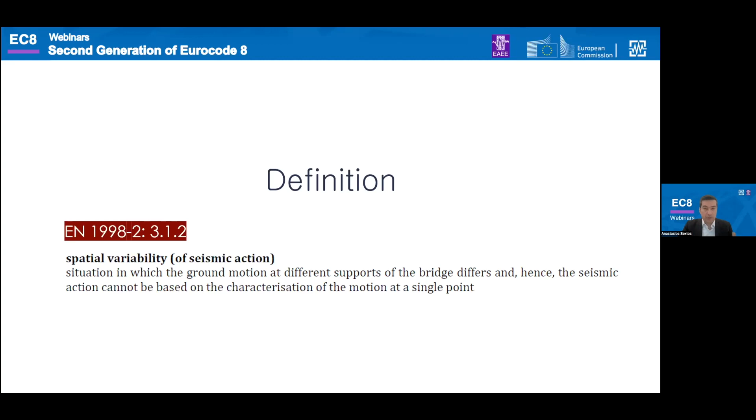So for the code, spatial variability is essentially a situation where ground motion between support points is different for whatever reason. In such a case, the code is suggesting that we should not do uniform excitation analysis - that is, time history, response history analysis with a single earthquake record for all supports. You may see that also in the literature as multiple support excitation or asynchronous excitation, but for the Eurocode, it's spatially variable earthquake ground motion.

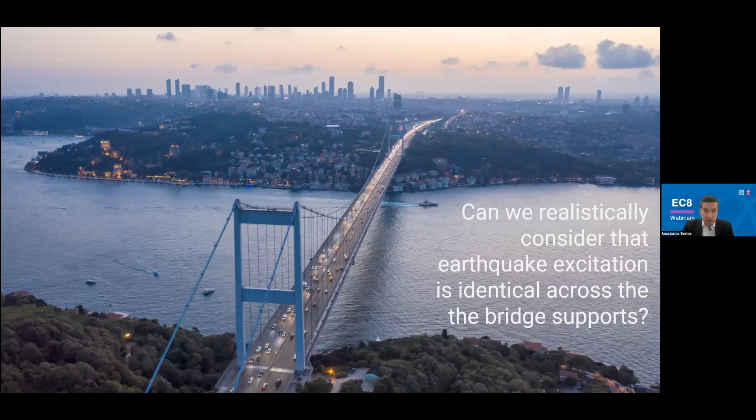Even intuitively, we can understand that ground motion shouldn't be the same. The trick is how to calculate it and introduce it in a code framework. Essentially, in order to do that, the previous version and the current version are splitting the problem in the background into several different scenarios and phenomena that are running.

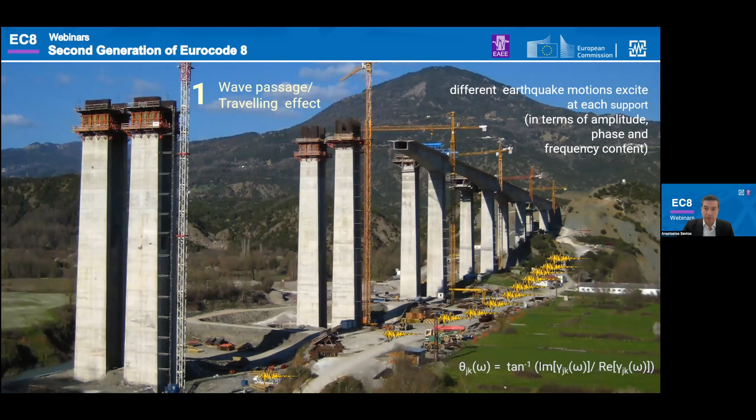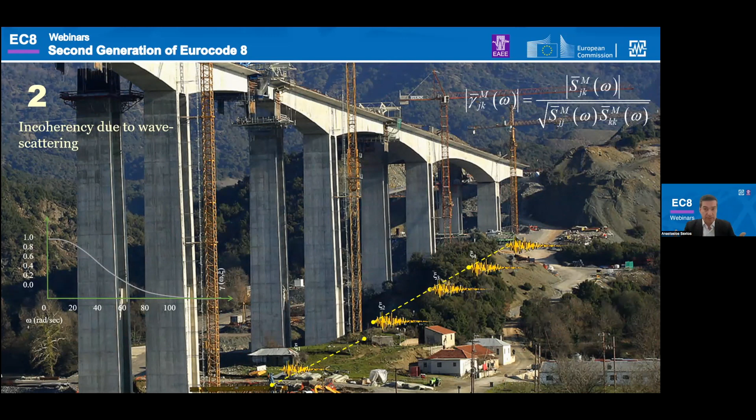One is the obvious fact that it takes some time for the waves to travel across different bridge supports. The second is that as the waves are traveling through the soil media, they are reflected, refracted, superimposed in all sorts of ways, and therefore they are losing their stochastic dependence, which practically means that if you compare two ground motions, they won't look the same.

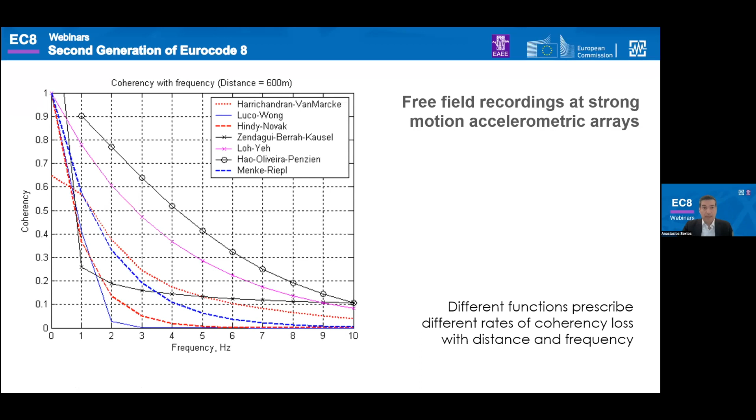That's the second important thing the code takes into consideration. If this is plotted versus measurements that have taken place worldwide, it effectively leads to something called coherency - the stochastic correlation, or how similar the ground motions look, in terms of phase and amplitude. Importantly, in the code, this coherency, this correlation drops with frequency, drops with distance. So the longer the span between two supports, the less correlated the ground motions are. The higher the frequency, the less correlated the ground motions are. This is nicely reflected in the code.

Obviously, there are also some other aspects, like local site conditions, 1D effects, 2D effects, 3D effects, topography effects, as Professor Paolo Franchin previously explained. This is also somehow implicitly accounted for in the code, as you will see. An important disclaimer here: when the bridge is short, and the time delay is not so important because of the short length, then these site effects dominate the problem, which is also qualitatively accounted for in the code.

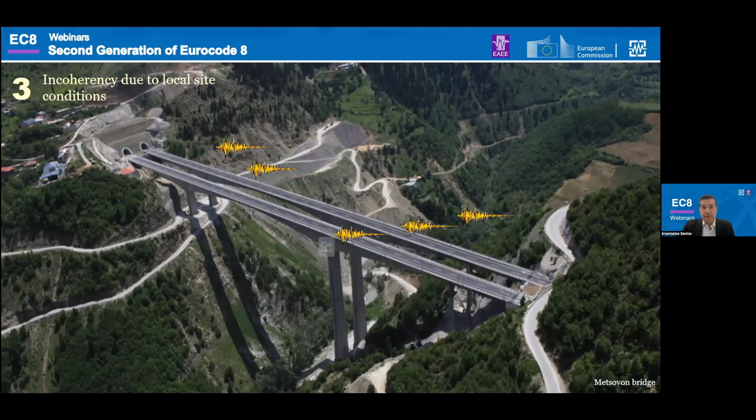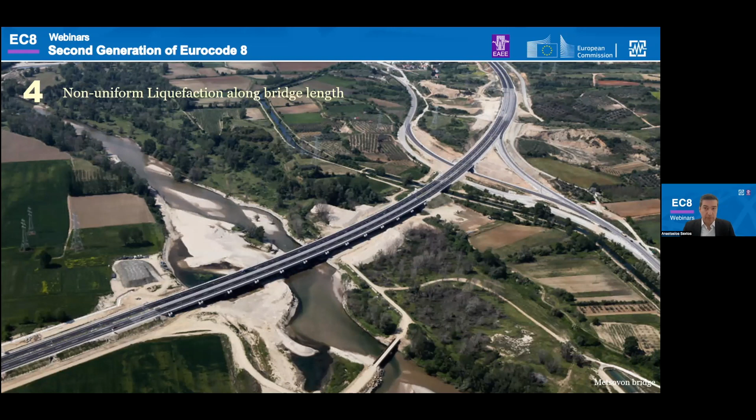This can be even more pronounced in case the soils are not just different, or site response is so different due to liquefaction effects or other special effects. So the less uniform the soil is, the less correlated or coherent the ground motion is, the more different the bridge response is. This was just a short introduction so that whenever we see something in the code, we understand what is what and why it is there.

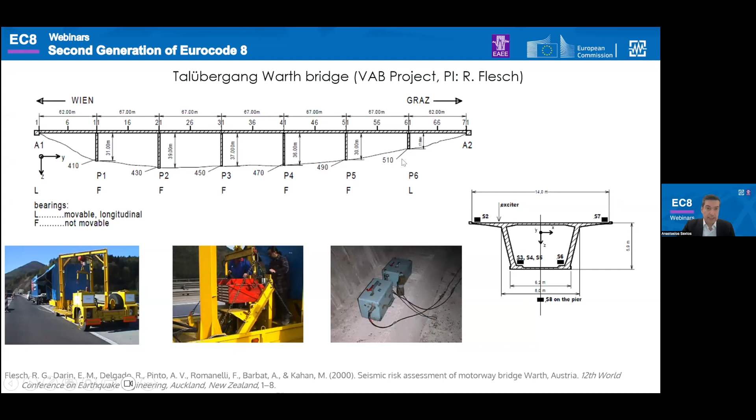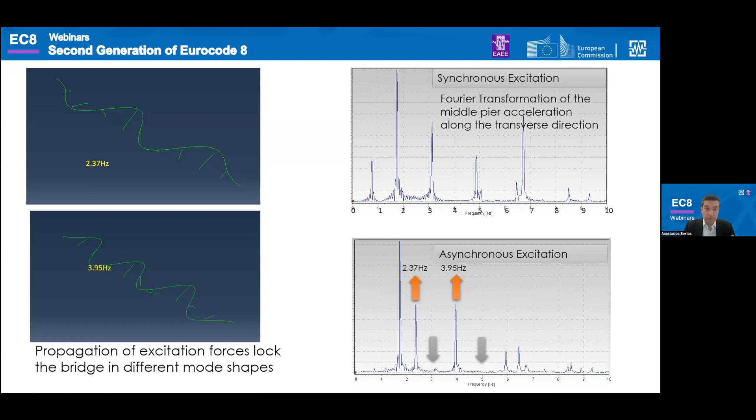Then the response of the bridge, because ground motions are not uniform as we assume in our computer models, is quite different because there are some modes—not any mode, typically the first and second antisymmetric modes—that get excited. If you plot the Fourier transforms or the contribution in any other way, you will see that they are excited. This is just a video to visualize it.

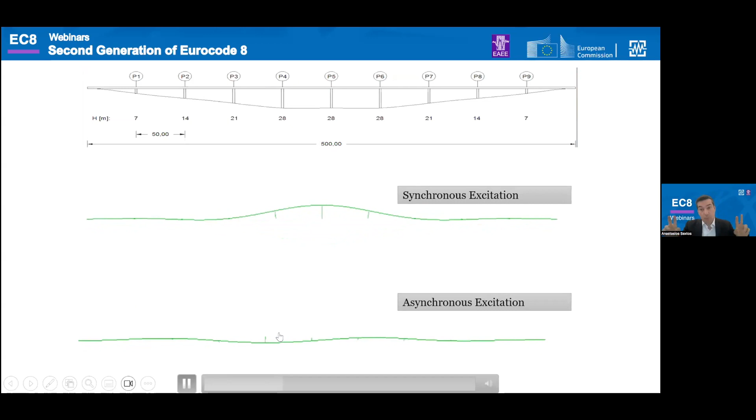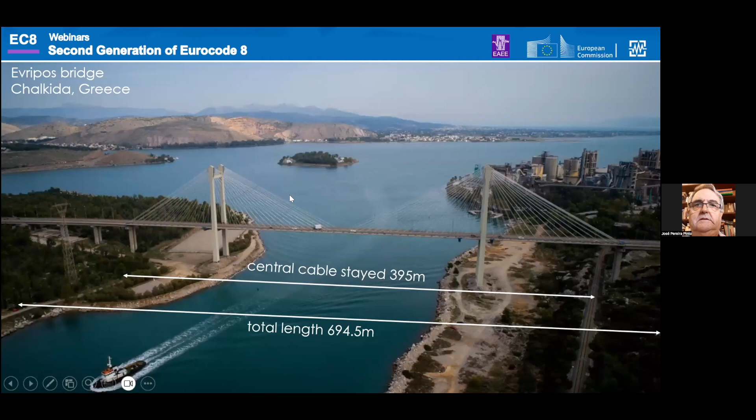I promise I'll switch directly back to the provisions. Essentially, if we excite this specific bridge with a single ground motion, uniform excitation, or with a bunch of different ground motions that are partially correlated, and run the response, looking at the bridge from the top, you will see that the transverse response for synchronous excitation is pretty much in its first transverse mode. Due to the more accurate asynchronous motion, it takes the shape of the first, second, and third antisymmetric modes because of the waves that travel. This is fundamentally different, and that's what the code is taking into account, which has also been measured in other bridges.

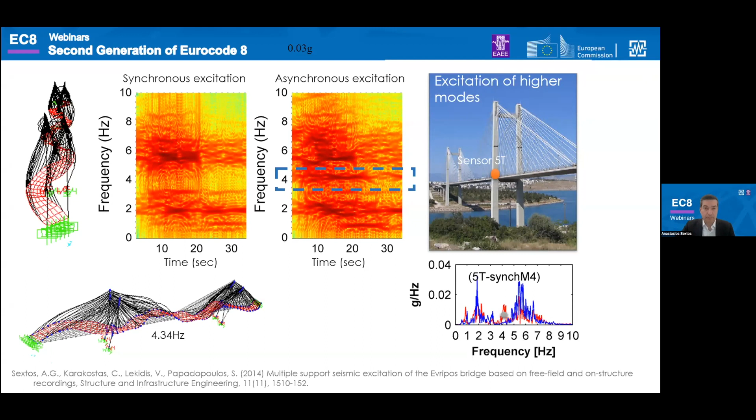That's my last scientific slide, I would say. If you plot the measured response of a bridge in the frequency-time space, when ground motion differs between different supports, an additional frequency of excitation appears, and this relates to an antisymmetric mode. So this doesn't happen in like 80-90% of cases, but whenever spatial variability phenomena are important, that's part of the picture, and that's essentially what the code has been trying to address from the previous version.

I'm now going directly to the code provisions—what the 2005 code was prescribing to account for this problem. First, it was offering the possibility to do something which was pioneering for the time, really. Then it was offering a quantification of this phenomenon, at least in terms of when you should account for it and when you could neglect it. And thirdly, it was offering a simplified static approach.

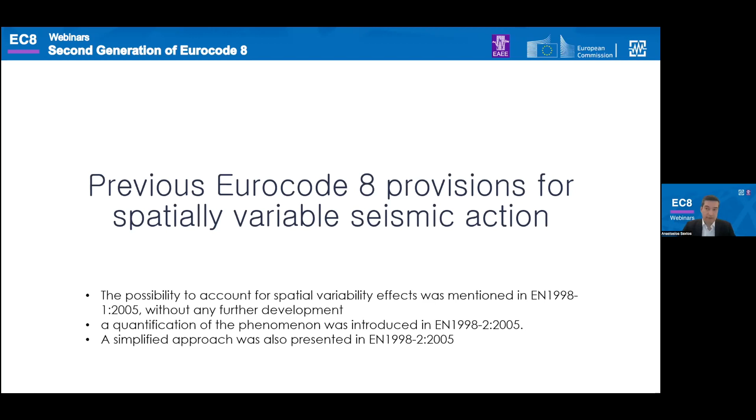I'm just showing you a couple of slides about what the previous code was doing, in case you're familiar with it, and also to understand how the evolution is now made to something similar but more accurate. The code was essentially providing a table, rightly so I think, saying that if your soil is quite stiff—let's say type A category—then you are more tolerant in terms of spatial variability, because most probably the soil is uniform and stiff, so site effects are limited, and therefore correlation of ground motions looks more like the synchronous case that we're accounting for.

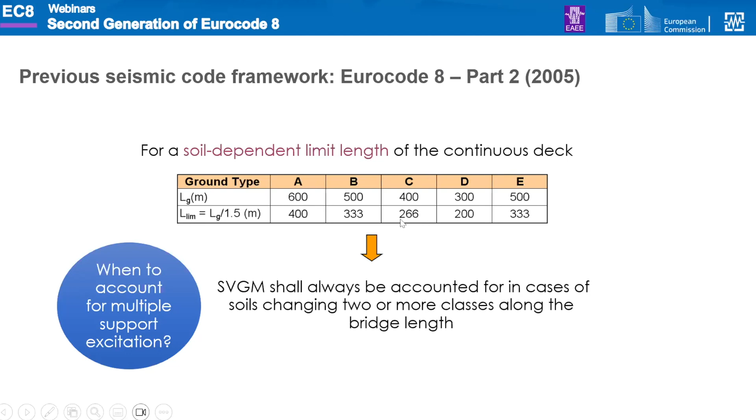So the softer the soil, the smaller the threshold length beyond which you should account for it. The code was providing these simple rules for where you should think about spatial variability and where you can neglect it.

Then it was offering—and this was really quite novel for the time—requiring the engineer to do two static analyses on top of the standard response spectrum or whatever nonlinear or linear time history analysis. One was to excite the bridge in pseudo-static displacements with a shape you can see here, this linearly increasing shape of support deformations. The other was kind of a deformation vector where the sign was changing from one support to the other. Whatever the static situations, you were getting some design quantities out of two static scenarios.

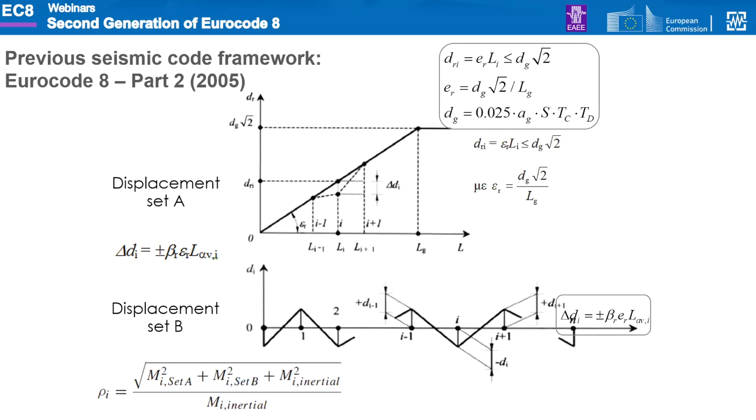You had a conventional one—this was the third one—and you were superimposing the design quantities out of these three scenarios. Now, the good news was that you were doing something. The challenge was that, A, this was static, and B, whatever the situation, the influence of spatial variability was quite low. So that was obviously in the right direction, but it was not necessarily capturing the dynamic nature of the problem we've been discussing, which I think is now more properly addressed.

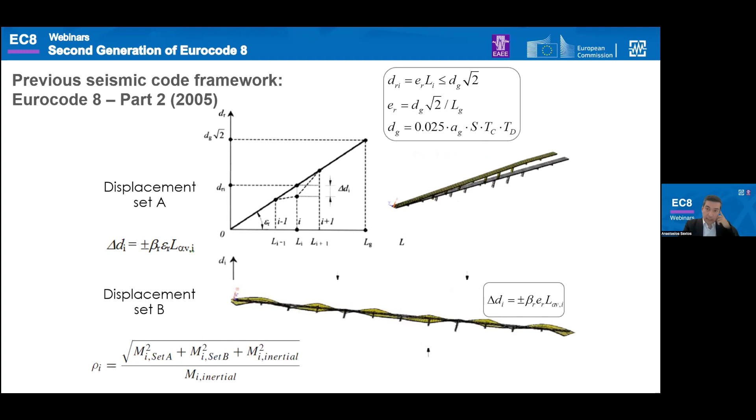This is how the static deformation scenarios looked like, and effectively this was the simplified solution that was offered. But the previous version was also wise enough to offer a rigorous method as well—not easy to apply, but quite accurate. This actually still stands as a method. The first equation is from the work by Professor Deodatis. The second equation is from the work of Professor Der Kiureghian at UC Berkeley. So essentially, it was also offering two rigorous solutions for those able to follow them.

The one was that, in case of a response history analysis, this is the way to generate your samples.

Effectively, there was a factor L relating to the loss of coherency that I was talking to you about. Omega was the frequency, theta was the delay, and phi was effectively a stochastic parameter to introduce some randomness in the generated sample. So this was quite an established method.

Then there was also the option to run a multiple response spectrum analysis. So a response spectrum analysis in principle, where you would have a different response spectrum for each support if the soil was different. And the way to superimpose for that was essentially using this equation, not the easiest probably in the world, but definitely was something that was in the code and you could follow.

An important parameter here is that D is the spectral displacement coordinate, if you like, and this rho here was practically the correlation between two adjacent support points for all possible pairs. That's the reason for the various summations here. So this was what the code was prescribing.

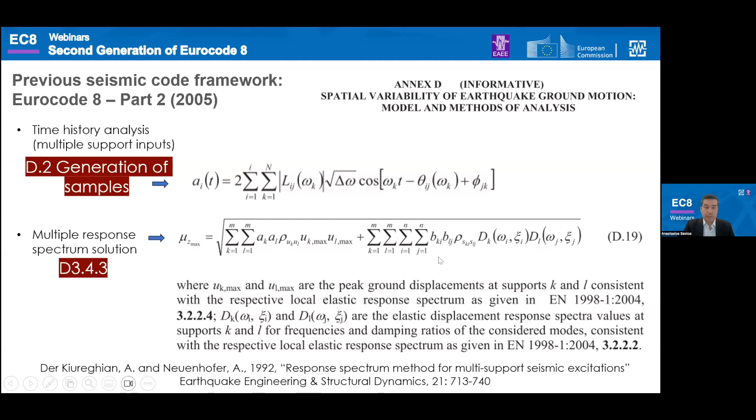Now, in the new Eurocode version, the new Eurocode provisions, the committee has essentially stepped on the existing provisions by injecting some more recent, let us say, research that has been established elsewhere.

So one important thing we need to clarify is that if you're looking for spatial variability effects in the code, you have to both look at the seismic action provisions in Eurocode 8 Part 1.1, because in principle, non-uniform earthquake excitation could also be applied in other structures. So that's a more general issue and therefore went to that part of the code. And also more specific provisions naturally for bridges, which is introduced in Eurocode 8 Part 2.

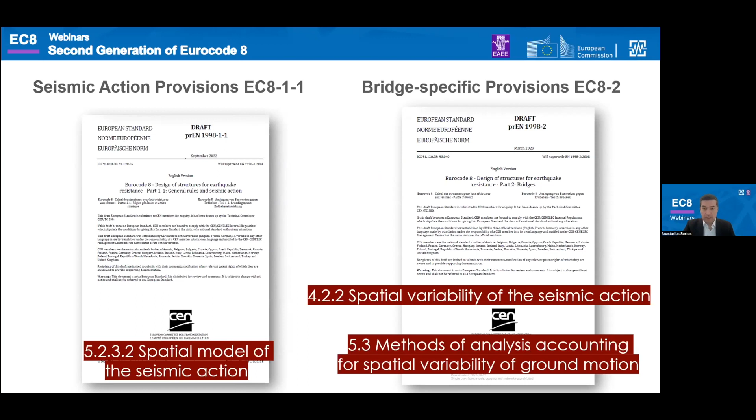So we'll be having some different tags depending on where different tables are coming from, just for you to be able to find them more easily. So first of all, the code for bridges is describing explicitly when we should take into account this specific problem.

There are three reasons or three rules. Any of the three, if it applies, will force us effectively to do something, and this is prescribed in another table, this famous table 5.3. So when should we account for spatial variability?

A, when the soils are quite different, and this is quantified by having an average VSH that differs by more than 200 meters per second. Now, why is this number? Because this was the average difference between different classes. How you would define VSH for the entire soil profile, that's something prescribed in Eurocode 8 Part 1.

So if your soils are different or too different, then you should do something according to the table. Or if your bridge is quite long, how long? This is the table: if for soil A it exceeds 400 meters, for soil B exceeds 300 meters, and so on.

Thirdly, if your bridge is perhaps not so long, but you do have quite long spans, because effectively what we are talking about is correlation between different pairs, and that's not just an issue of the total length. It is also an issue that relates to the distance between adjacent piers.

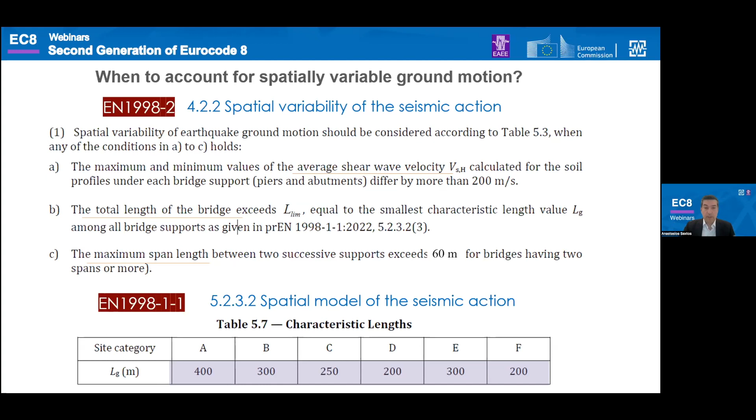Therefore, if any of these three applies, you should do something. We'll come back to that, what you should be doing in each situation. It is also building the current version in Part 2. It is building on the previous provisions that I just showed, the method presented by Professor Der Kiureghian.

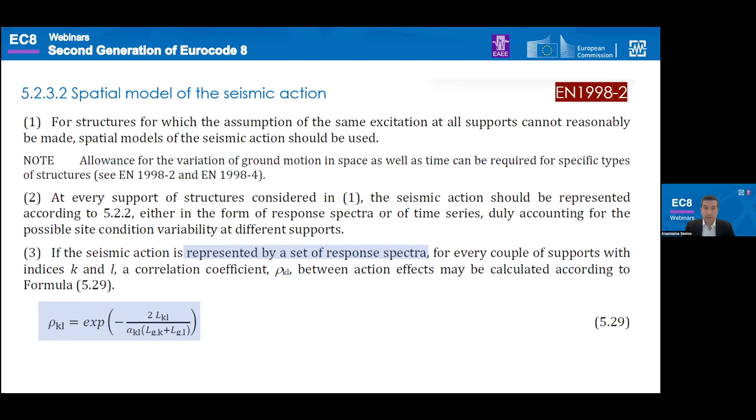So in case you would wish to represent spatial variability of ground motion by a set of different support-dependent response spectra, and you would need to find these correlation factors from one point to the other for all possible pairs, then you can use this exponential factor. No surprise, this is a factor that drops with distance, a decay factor, because like we discussed, the correlation between different ground motions drops with distance.

And therefore, not only can we have this factor here that reduces the correlation factor with distance, but also an additional factor, the AKL, that accelerates this decay of correlation when the soils are less uniform, because effectively it subtracts the characteristic lengths of different soil profiles, which means that the more different they are, the higher this coefficient, and therefore the quicker the drop of coherence. But if they're identical, say in the case of uniform soils, this all ends up equal to 1.

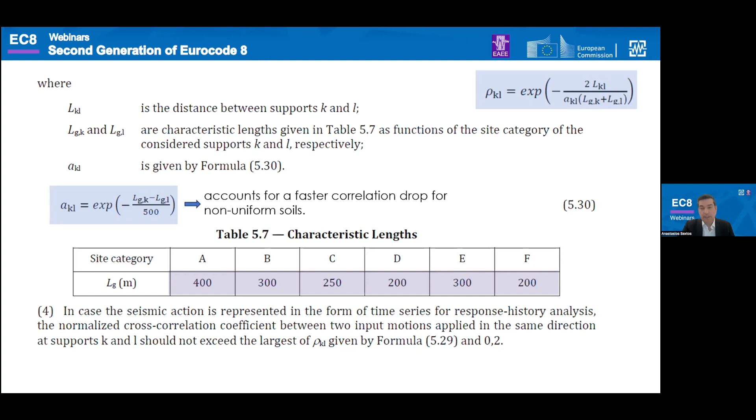This is a very simple solution offered by the code for those who would be interested to do more rigorous multiple response spectrum analysis. This is just for your information.

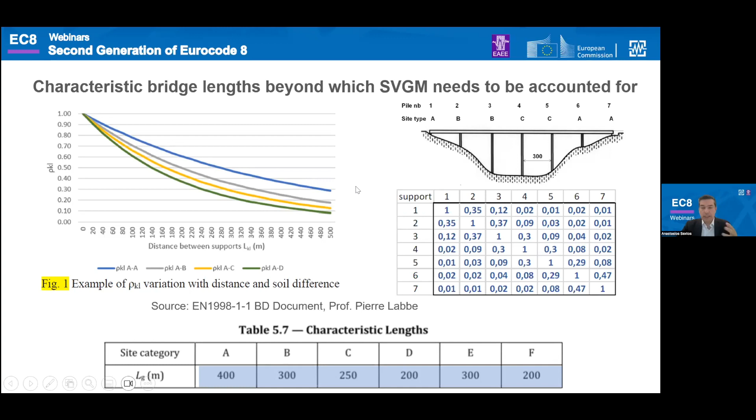If you plot that in a chart, you would see that between different points, the further they are apart, the quicker the loss of their coherency, and basically the quicker the reduction of this correlation factor. That makes a matrix, because all pairs involve all different support points. The correlation of motions at the same point is unity, while the partial correlation of ground motion drops like this. So effectively, this is in the right direction, it seems.

It is also offering a set of quick advice on what we should be doing when designing structures for spatial variability, assuming that it is required depending on the situation. The basic distinction made, in a vertical sense, is whether the bridge is short or long, and this also involves the span. So there are essentially two extreme situations: either the bridge is short and has short spans, or the bridge is long or has long spans.

In the first case, if the soil is uniform, the code simply says you should do nothing. You just have some rest, like the person here, or have a cup of coffee and you're done with spatial variability. But if your bridge is long, or you have a long span, then essentially you should do something.

The code offers a simplified higher mode excitation method, which I'll describe. For those who don't want to implement that, there is a way to get away with it by not applying the simplified method, but instead applying a penalty to the design quantities, increasing them by 20%.

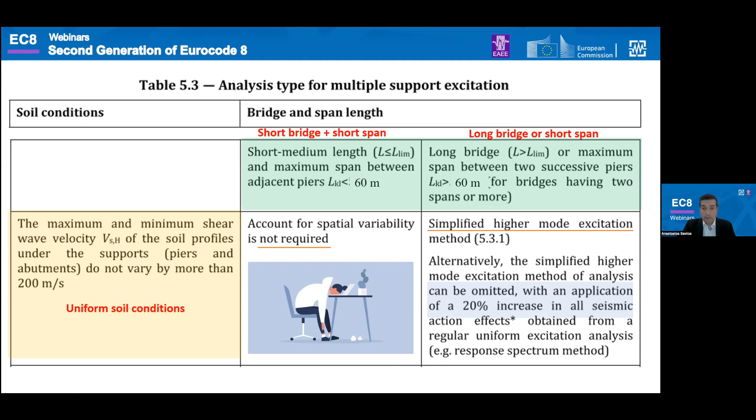Now there is also the case where the soil is non-uniform, so the spatial variability effect is more pronounced. In the case that the bridge is short, the span is short, yet the soils are very different, the code suggests what's important is not the wave passage, but mostly the local site conditions.

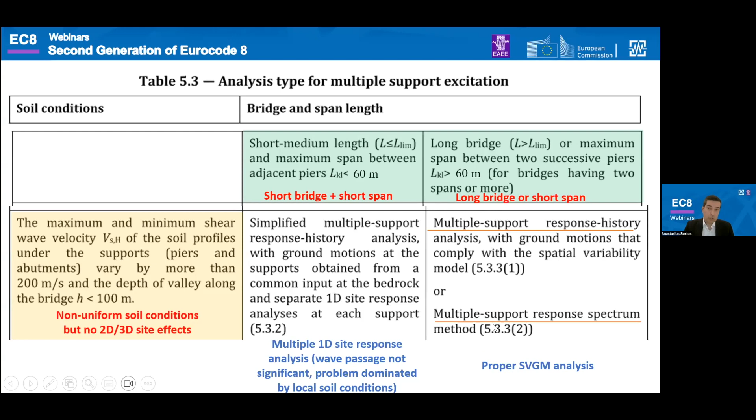But if the bridge is long or the span is long, then you should do a proper spatial variability analysis, either in the time domain or the frequency domain, with multiple support response spectra using the correlation factor the code provides. Then there is also the case that the designer wouldn't like to do that.

The code offers the possibility for the designer to simply not do 1D effects and 1D site response analysis, but instead take the penalty, increasing the design quantities by 20% for the short bridge and span scenario, or by 30% for the long bridge or long span scenario. That gives some freedom and flexibility to the designer, since not all design offices have the ability or confidence to work with these methods.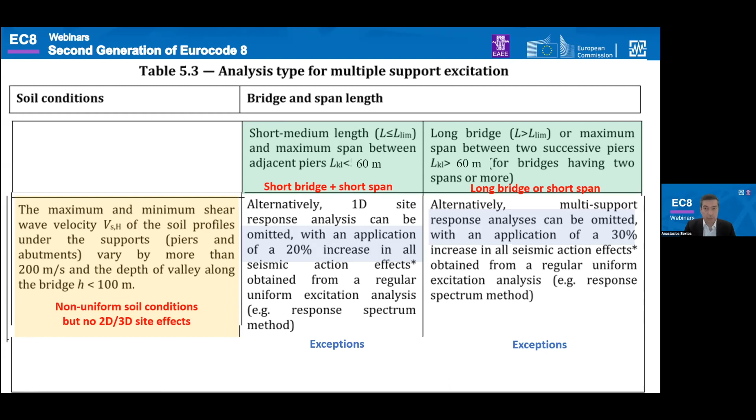But clearly with this approach, the more complex the problem, the more complex the method. Still, the designer can always get away with a simple penalty rule. In the case that the situation is so complex that there are topography effects, 2D effects, 3D effects and the like, then someone would either apply a 30% increase in the design quantities or do a proper analysis, including the entire valley, and a proper site response model.

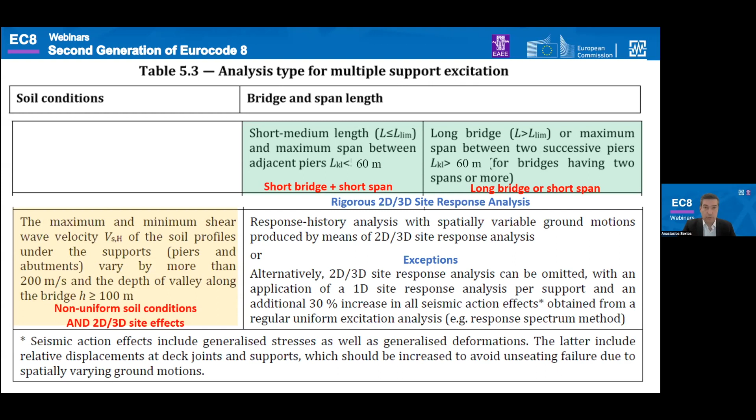When we talk about seismic design effects or design quantities, we mean everything we can imagine - all the design numbers, bending moments, shear forces, displacements, relative displacements - everything used to design is effectively amplified by a percentage if we don't want to use a more rigorous method. Here are a few final slides on the simplified method offered for the case of uniform soils.

I'm going to save this slide as a concept and pass through the rest quickly to finish on time. But the important concept behind these suggestions: if the soil is uniform, you could do something different that is easy to implement, along the lines of the previous Eurocode version of superimposing static situations. But instead of focusing on ground motions, which are quite uncertain and can't be done accurately in a design framework unless probabilistically, which isn't really a design method, the concept now is shifted.

The focus is shifted from generating samples to amplifying quantities associated with higher modes typically excited by spatial variability. So the code isn't saying spatial variability effects will be important. It says that if they are important, these are the structural members affected by the first and second antisymmetric modes, and therefore you'd better just amplify the design quantities for these selective members affected by antisymmetric modes, and that's enough.

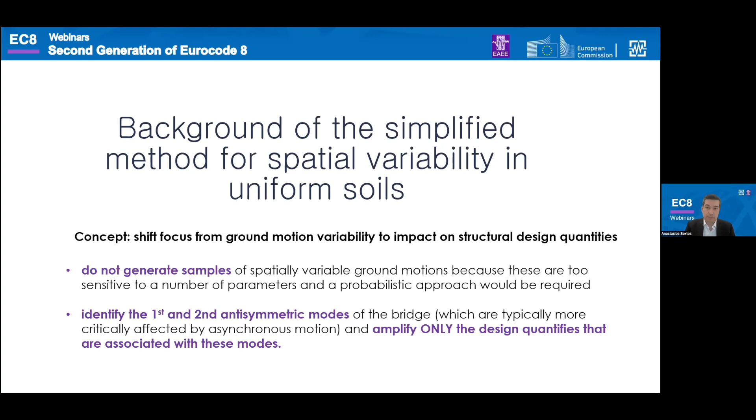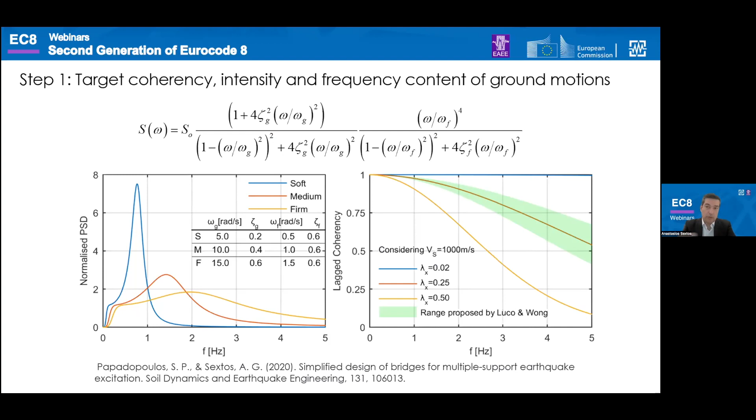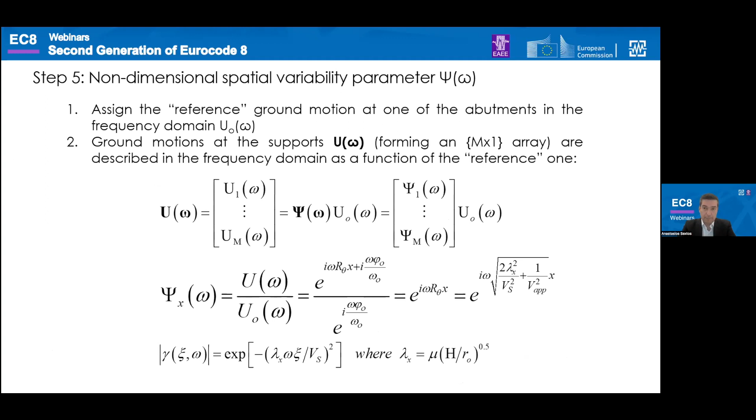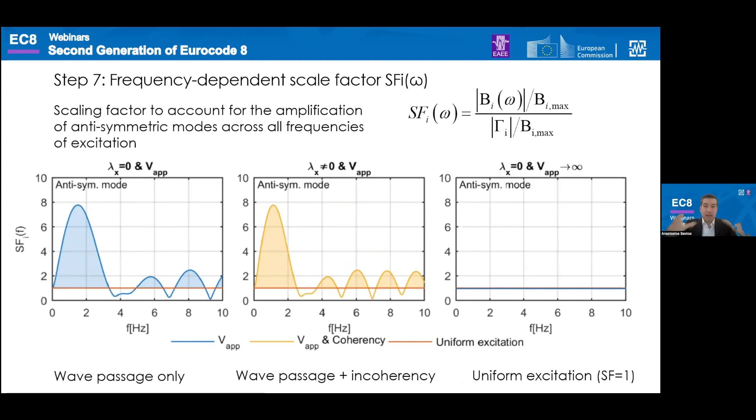Why? Because your soil is uniform. I'm not getting into the mathematics at all, just 10 seconds per slide. If somebody would like to do the simplified method properly, outside the code provisions, you'd need a target coherency—how coherency drops with distance—to know your soils, do your modal analysis, calculate modal participation factors, calculate the influence matrix, figure out what happens if a unit static displacement is imposed at one support, what the displacements would be in the remaining structure, and essentially quantify in a mathematical way the non-dimensional spatial variability parameters from one point to another. This also involves calculating the excited antisymmetric modes and quantifying how much they've been excited. That's the background, and I won't talk more about that.

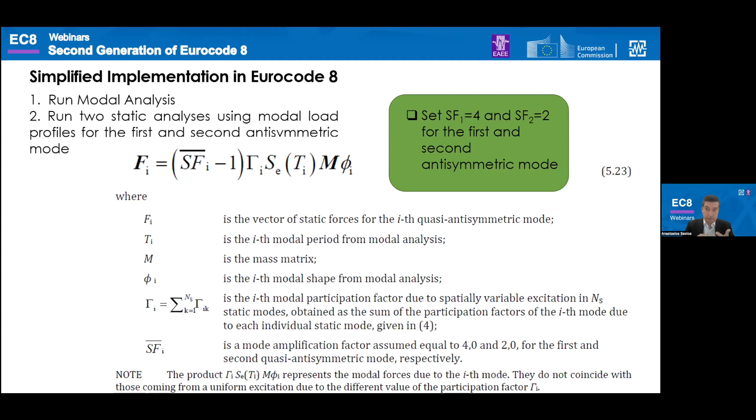But what the code actually does is simplify all this, assuming it's more accurate to focus on the structure than on the ground motions, asking the designer to do four simple things: run a modal analysis, then run two static analyses using the modal profiles of forces from the first and second antisymmetric modes, amplified by a factor parametrically identified in the literature. Essentially it's a pushover with a vector of loads, a static analysis. You get design quantities out of this for the first and second antisymmetric modes, which is quite easy. Then you run whatever analysis you'd run anyway—response spectrum or time history—and simply superimpose. And if you don't like that, you can always take the 20% penalty option and get away with it.

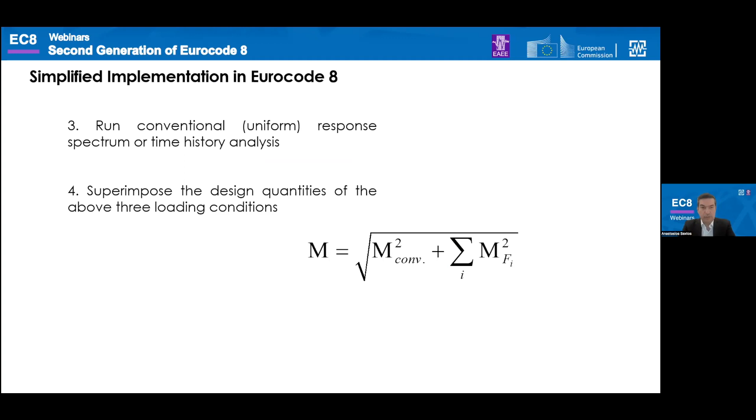So this was just to simplify. I took the liberty to present it in a bit more detail, just in case this was needed.